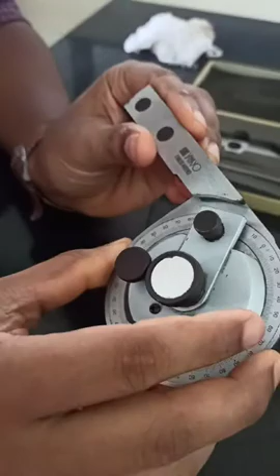So this is a setup used for the bevel protractor. The aim of the experiment is to determine the angle of a given specimen by using the bevel protractor.

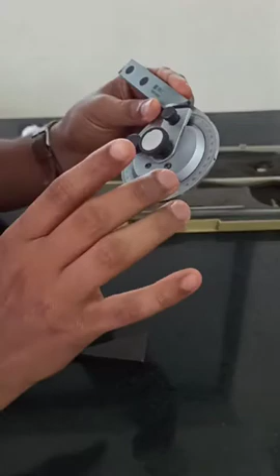Normally we can use the normal protractor to measure this, but we can get only degrees. If you want accurate values in terms of minutes also, we need to use the bevel protractor, so it will be a more accurate instrument.

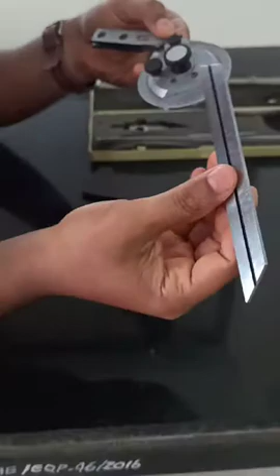This is one part of the bevel protractor, and we have the blades over here. We need to use these blades as well as this setup to measure the different angles of a given specimen. So we have taken this triangular specimen, and here we need to find out the three angles. But before finding the angles, we need to know the least count of this experimental setup.

So just you can see here, there are divisions provided in the clockwise direction as well as in the anti-clockwise direction. Suppose if you are taking the reading in this direction, that is anti-clockwise, then you need to count from the vernier scale. You can see here, that is 0, and 5 they have mentioned. You need to consider the anti-clockwise direction only. If you are taking the reading in the anti-clockwise direction, then we need to consider the vernier scale in the anti-clockwise direction. If you are taking it in the clockwise direction, then you need to consider the clockwise direction of this vernier scale reading.

Now the least count is nothing but the main scale reading, which is 1 degree, and 1 degree stands for 60 minutes. So 60 minutes divided by the number of vernier scale divisions. Total we are having 24 divisions, but we are considering only one side, so the divisions are 12. So 60 divided by 12 gives 5 minutes.

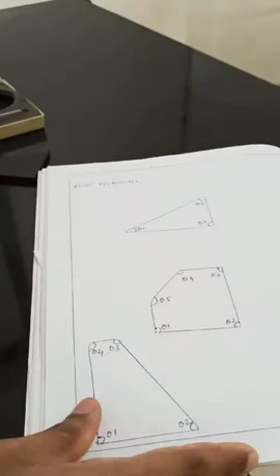So we need to draw these images over here. This is the specimen that they have given us, a triangular specimen.

This is the setup blade. This blade we have to insert through this. So we need to insert this blade over here. After inserting, we have to place this specimen like this. This is where we are measuring angle theta 1, so we need to place it like this.

After placing like this, we need to rotate and tighten this by holding the arrangement properly. We need to tighten this as well as this one. After tightening these two knobs, we can remove the specimen.

After removing the specimen, we need to see the readings here. We are taking the reading in the anti-clockwise direction. You can see it is showing 30 exactly, which is the main scale reading, and then we check the vernier scale reading. It shows around the third division.

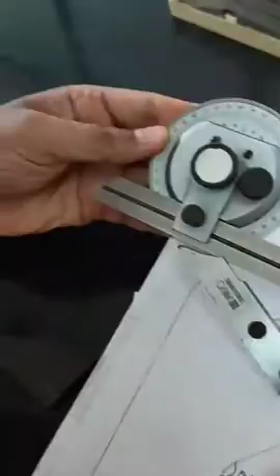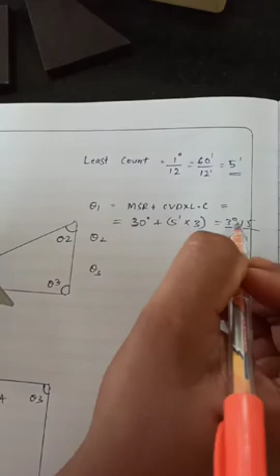Now we have to take the reading as MSR, which shows 30 degrees, plus CVD, where the least count is 5 minutes into the third division. So the value obtained is 30 degrees 15 minutes. This is the reading obtained for theta 1, the first trial.

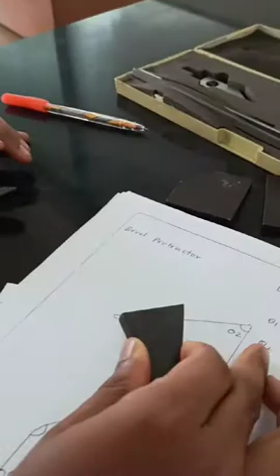Now we need to go with the second angle. So again we need to loosen this, rotate it like this, and place it. For the second angle, theta 2, we need to adjust the blades and place them like this. After placing, we have to tighten the screw, and we should note that this position is properly located.

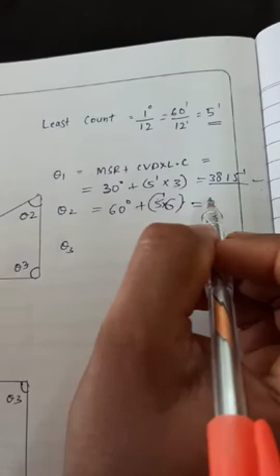After tightening this, we take the readings. The reading obtained here is 60 degrees, and since it is in the clockwise direction, we need to consider the clockwise vernier scale. The sixth vernier division is showing exact coincidence, so it will be 60 degrees. So theta 2 is 60 degrees plus 5 minutes into 6, giving a reading of 60 degrees 30 minutes from the second setup.

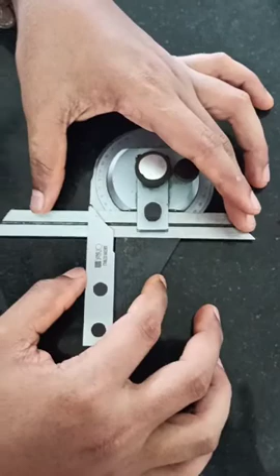For angle theta 3, again we need to loosen this and place it like this. After placing it, we need to write this down. This is the position. After locating this, we need to measure the angle. We approximately know it is around 90 degrees, so we should get a reading in that range.

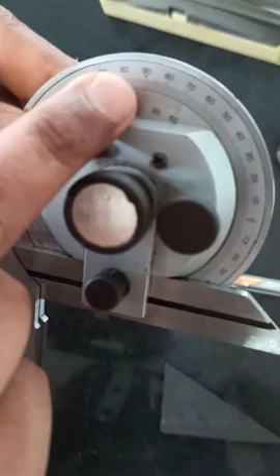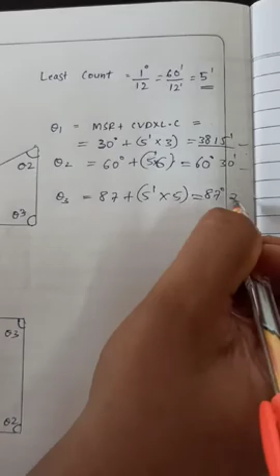We can see here it is 87 degrees, and it is in the clockwise direction. The main vernier scale reading is 5, so the reading obtained is 87 plus 5 minutes into 5, giving 87 degrees 25 minutes. So these are the three readings obtained from this experiment, and this is the result.